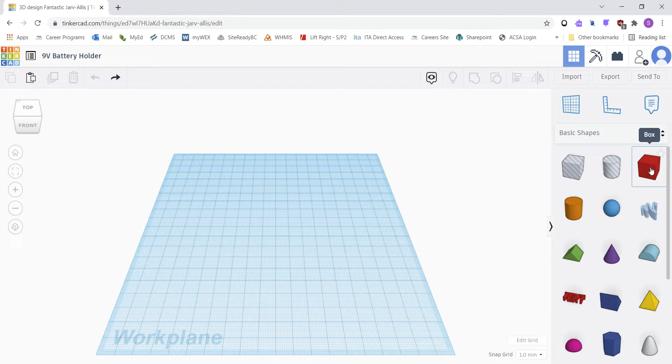In this tutorial, I'm going to make a 9-volt battery holder. So you can see already I've renamed the file up here, and here we go. So start off with a good old box. Bring a box out into the middle. I'm going to scroll in with my scroll button and right mouse click just to change the angle a bit because I just like it better.

And I click to highlight the numbers of the box I want it to be. So I'm going to go 30 by 20, and I'm going to set the height right away to be 21. So there's my first part of the holder. Next, I want to cut out this section here for the battery to go into. So grab another box. This time it's the hole.

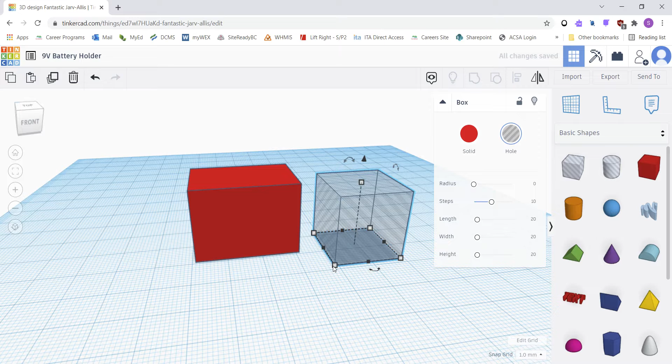And the size of this one this time is going to be 26 this way. We're going to keep it 20 that way. And the height, we're actually going to make it 19. So we click on it, go 19. There it is. Now, I'm going to align the two. So highlight both of them. Go up to align. From align now, I'm going to align it this way.

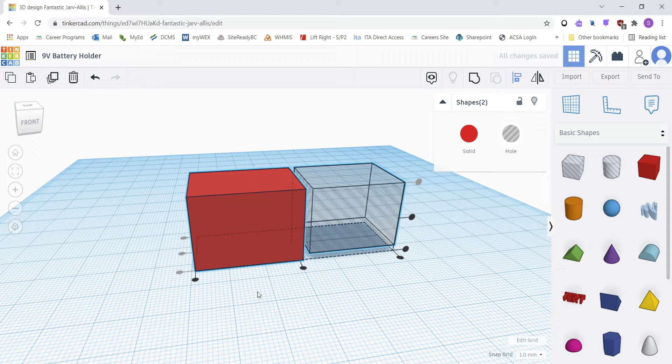I'm going to align it this way, so this one's off the ground and up because there's going to be a cutout. And finally, I'm going to align it this way. Okay, so it goes into there. So there's my alignment, and because I want to see it as an actual hole, I'm going to highlight the whole thing, and I'm going to group it.

And what will happen is this section here gets cut out, and it actually looks like an actual U shape in a second. And there we go. All right, so it's grouped now, right? So I can move this whole thing all as one. Now what I'm going to do is create two little bumps on each side so that the battery gets held in place.

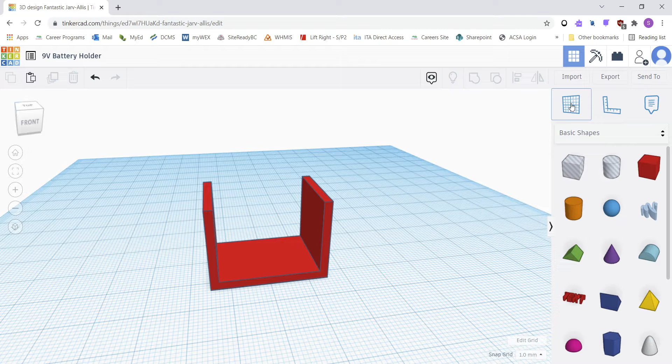So I'm going to start with a work plane, and I'm going to go over to this side and click, and now you can see that it's aligned to that face. I'm going to grab, they call it a round roof, I call it a half circle, and we have that. We're going to rotate it 90 degrees right away, and then we're going to change the size.

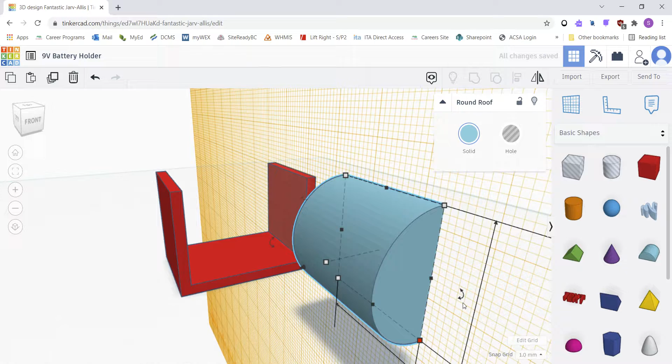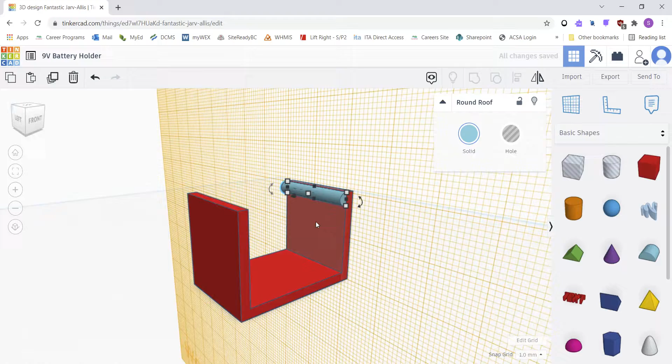So instead of being really wide here at 20, we're going to change that one down to 3. And instead of really tall like this, we're going to change this one, whoops, let's just make sure we can see it, down to 2. Okay, so once again, I can just take this and attempt to align it up, and I probably could just align this like this. Actually worked pretty good because we're on a grid and everything's nice numbers, right? So that was pretty simple. I won't even try to align.

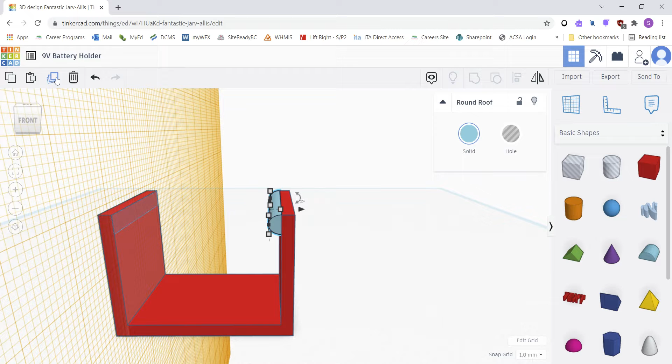So now what I'm going to do is put one on this side. So I'm going to take the work plane, right? So back up, select work plane, click on this side. Now we're over here. Take this object. Why create another one? So can you right mouse click? No, you can't. But what you can do is if you hit Control C, or up here you can go to copy. Okay, duplicate and repeat. There's a second one in there now, right? And it's there. And then what I can do is basically move it, right?

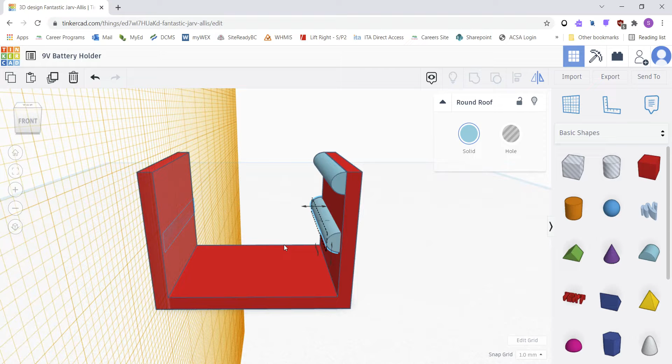So there's that one. Now I got to get it over here. So I'm actually going to mirror it, and I'm just going to change this angle a bit so it's maybe a bit easier to see here. So I'm going to click on mirror, and it actually mirrored, and I'm going to select this arrow, and you see it flipped. Now again, I can just drag it, and I'm just going to cheat here, and whoops, Control Z, and I'm just going to drag it. No, apparently I'm not going to drag it. So yeah, there I am.

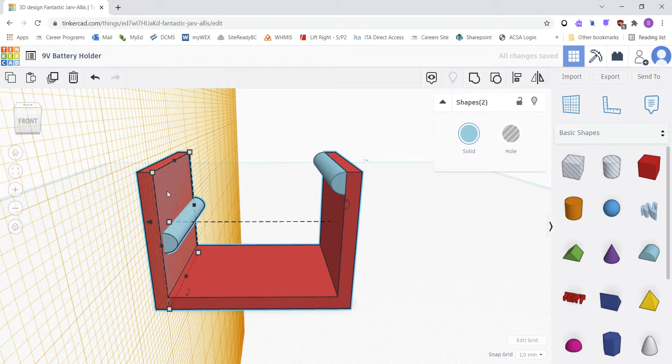Right, so I'm just going to put it to here, and again, if I wanted to align it, I could then click this object here and go align, and align the way I want it, right? So I can align it to wherever I want. So I'm going to cheat on this one and basically, whoops, grab the whole object and up to there, kind of go this way, and then go to there, right? Because you're using the grid, it's pretty easy. When you got really weird numbers, it's kind of hard to align things.

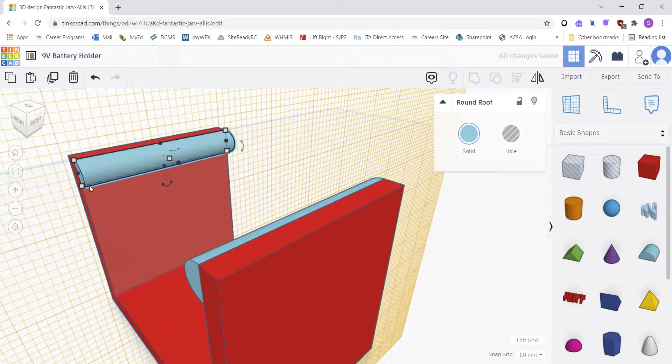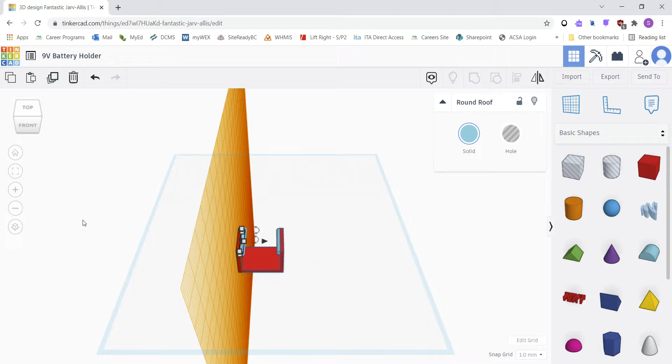But there that is, right? That's aligned nicely there. That looks like it's aligned nicely there. We can scoot around and kind of take a peek at it, right? Yep, we're all good. Okay, so I'm just going to save this, right? Well, it's already saved. I'm going to get rid of the plane that I'm working on and go back to the basic one. So if I just hit home here, right, it's kind of weird looking. So I'm just going to hit plane, plane down there, and we're back to normal.

So there's my object. I can obviously group it. And once I've grouped it, it'll actually be all one color, and I'm done. So now I can just go to export, and from export, STL, and you can see it's preparing the model for export, and basically there it is, it downloads. All right, that's the end of how to make a battery holder, right? And then you can glue it. I guess what you could add still is a hole here, one or two, and then you could screw it in place, but we're not going to do that in this tutorial.